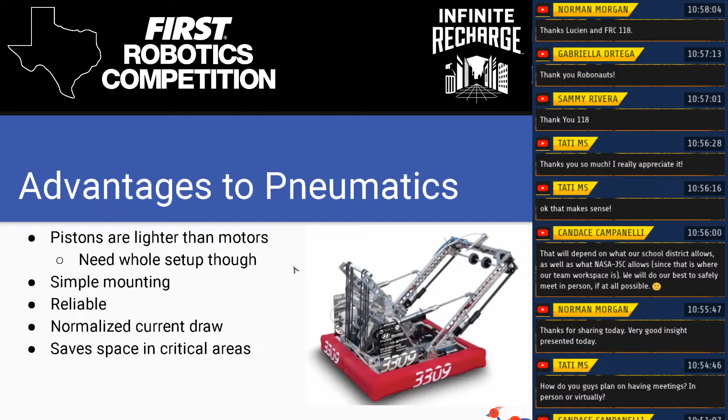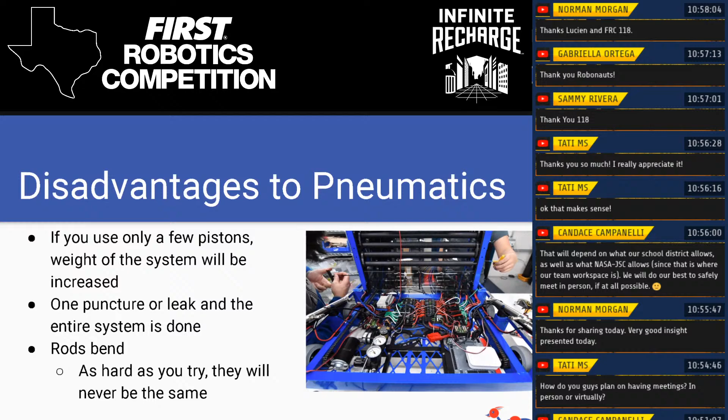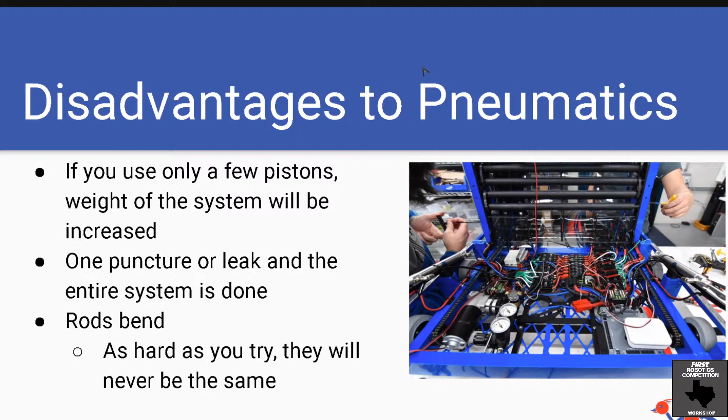Disadvantages to pneumatics: if you only use a few pistons, the weight of the system will be increased compared to motors, since the more subsystems that use pistons, the lighter your robot becomes. One puncture or leak and your entire pneumatic system is done for, because the pressure leaks out, and during competition you'll lose pressure and pneumatics just won't work. Piston rods will bend, and as hard as you try, you will not get them straight again, so you'll need to include something to take the stress off the rods in your design.

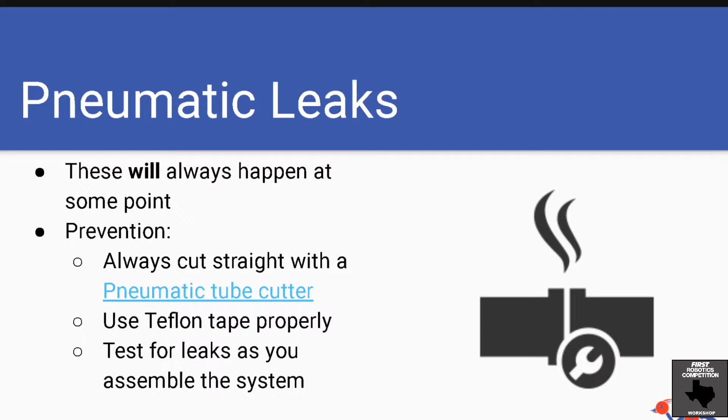Pneumatic leaks will always happen at some point during the season when you're doing pneumatics. Good ways to prevent these are to always cut straight with the pneumatic tube cutter, use Teflon tape properly and correctly, and test for leaks as you assemble the system.

Finding leaks: a couple ways to find leaks. If you're in a quiet environment, you may be able to listen for the source, using your fingers to feel for a leak. Generally leaks might not be felt because they're so slight. Using soapy water is a really good way to find possible leak points, and you need to watch for bubbles because air will make the soapy water bubble. If you're still having trouble, you can section off parts of the system, plug open ends up, and search for leaks there.

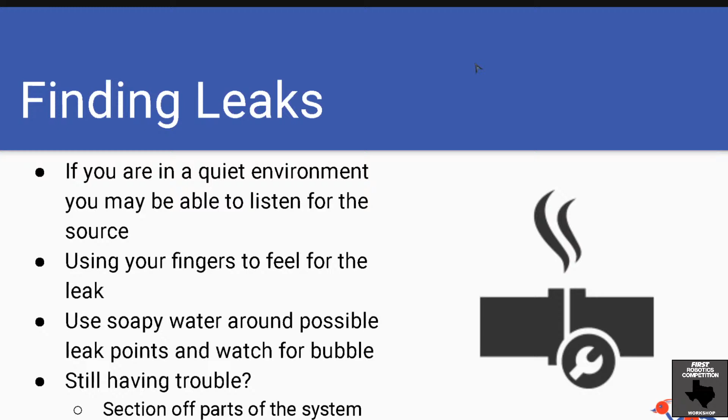Mechanical components, the pneumatic cylinder. This is what is moving your subsystem. The bore size is the hollow part inside the cylinder. The larger the plunger area, the more force you have to use in your subsystem. And that plunger area is basically the bottom of the rod that's getting pushed by air.

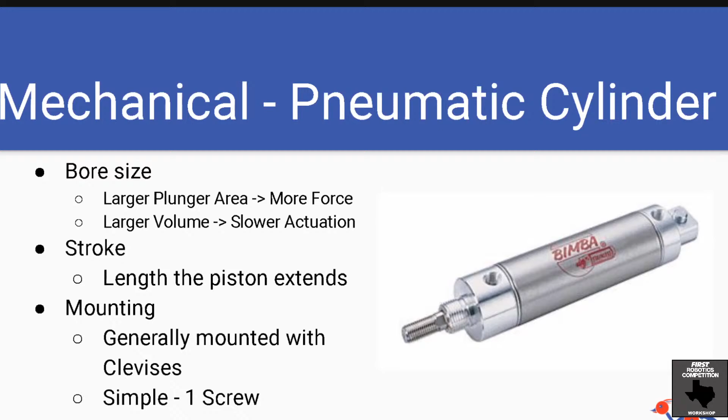The larger the volume inside, the slower the actuation, so you extend slower. The stroke is the length the piston extends, so your rod comes out how much and retracts how much, that all gets included in your design. And generally for mounting, you use clevises, and they're very simple. One screw should be enough.

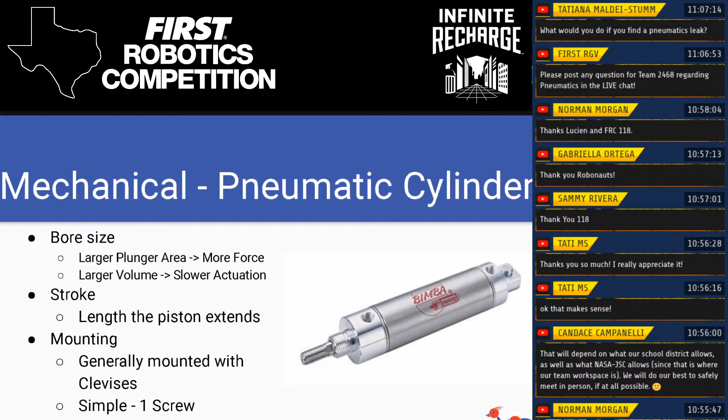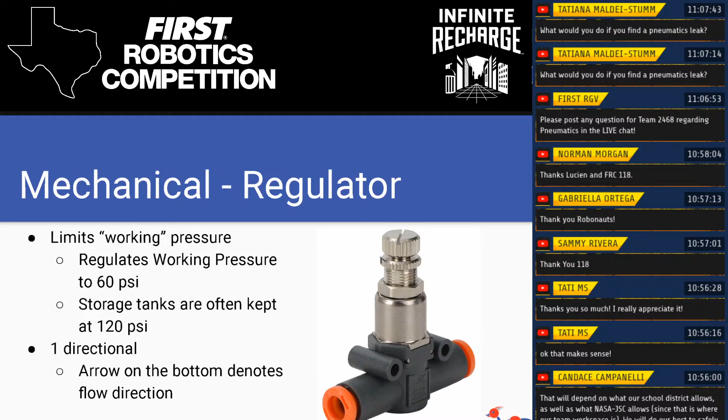The regulator limits the working pressure to up to 60 PSI on the side your pistons are using in the pneumatic system. Storage tanks are often kept at 120 PSI, so storage tanks are where you store your pressure on your robot. The regulators are always one directional; they regulate the working pressure in one direction, not the other, so the air won't be regulated if it's flowing the other way. The arrow on the bottom of the regulator tells you which way your flow is being regulated.

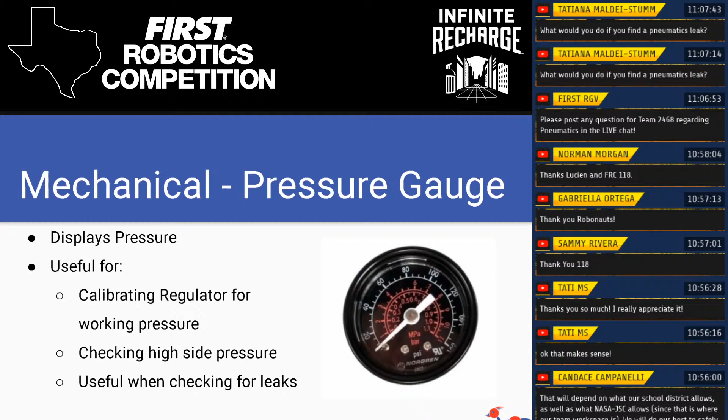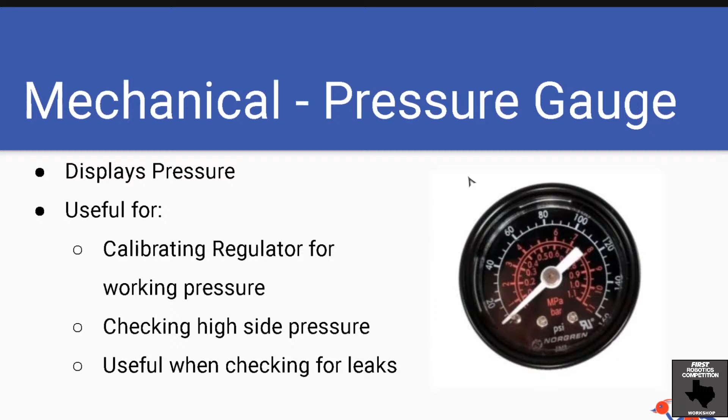The pressure gauge displays the pressure, and it's useful for calibrating the regulator for working pressure and also checking the high side for pressure. The high side is where the 120 PSI pressure is, so your air tank's storing most of the pressure for your robot to use. This is useful when checking for leaks, because if you see that your pressure is going down, there's a leak somewhere, and that's not good, especially for the high side, where you're not going to have enough compressed air to use during the competition.

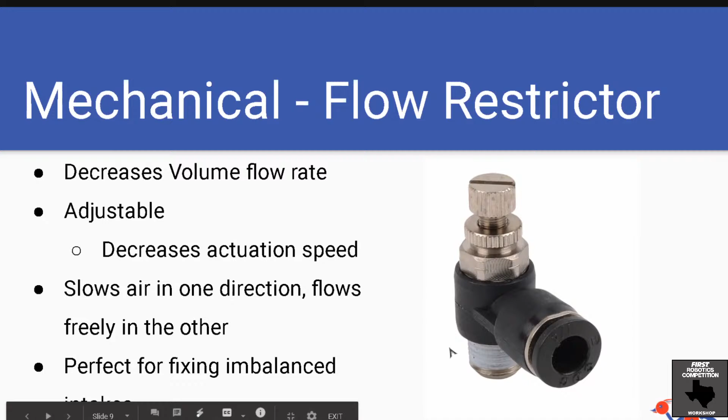The flow restrictor decreases the volume flow rate into the pneumatic cylinders. These are adjustable, so it decreases the actuation speed of your pistons or cylinders. It slows the air in one direction, and the air can still flow freely in the other. So it's similar to a regulator, but used for just slowing down your actuations in general. This is good for fixing imbalanced systems, where maybe you have two pistons with more weight on one than the other, but you want them to extend at the same rate. You can use flow restrictors to slow down the lighter side and make it the same speed.

Air tanks are where you store your air pressure, or the pressure and energy, and these can be used on the low side or the high side of your pneumatic system. The low side is regulated at 60 PSI, and that pressure is used for extending the pneumatic cylinders. The high side is where you're storing more of your compressed air. You can use the AMB design calculator to determine how many tanks you need on each side or at each pressure. It's illegal to modify these, so you don't want to paint them, add stickers, or mess with them at all.

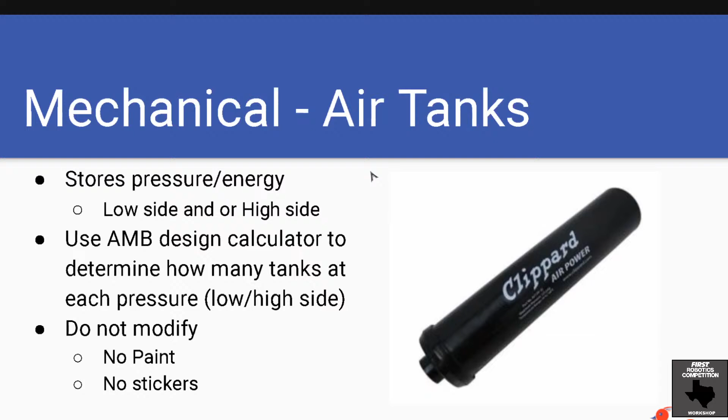The AMB design calculator, this is the pneumatic portion of it, and it calculates the amount of air tanks you need. On the left side chart, you'll put in all your known values for your pneumatic cylinder, time, and cycles, and it'll give you max force and total volume usage. You'll try to match that up with the chart on the right, where your tank volume, number of tanks, and tank pressure give you total tanks volume. So you have to experiment around with this to figure out a good match, how many tanks and what size tanks and everything like that.

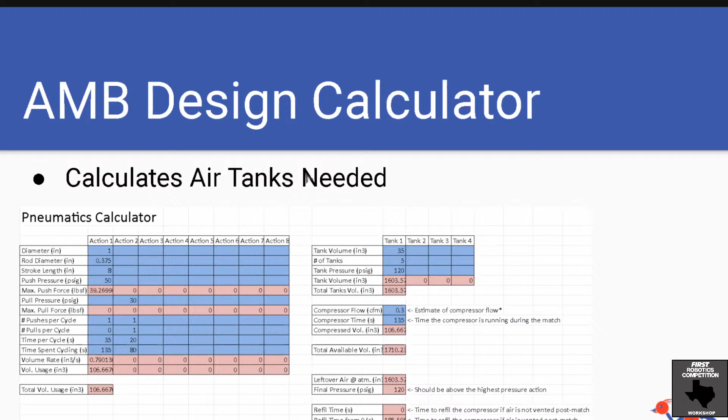Push to connect fittings, that's what PTC stands for. This connects everything in your pneumatic system together, the tubing and where the air flows through. Each fitting generally has about 2 to 7 ports on it, so the one in the picture has 3 ports. You want to ensure the tube is cut perpendicular and neatly, in order to minimize the risk of having leaks.

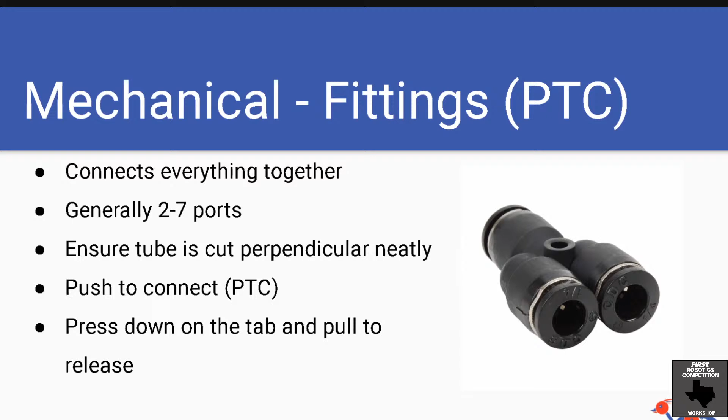These are push to connect, you push the tube in and it stays in. If you want to release the tube, you press down on the tab. You can see these separate tabs on the end in this image, these 3 tabs on the ends, and you press down and pull out the tube.

Threaded fittings connect components attached to the compressor, and you must use Teflon tape for all threads. Although you don't want to cover the first threads because you want to actually be able to thread your fitting into the components. You also use Teflon tape on the threads that will be going into the pneumatic cylinders, which you will be screwing into.

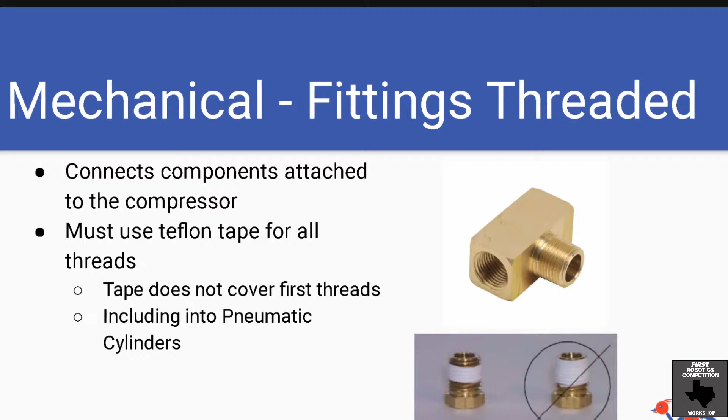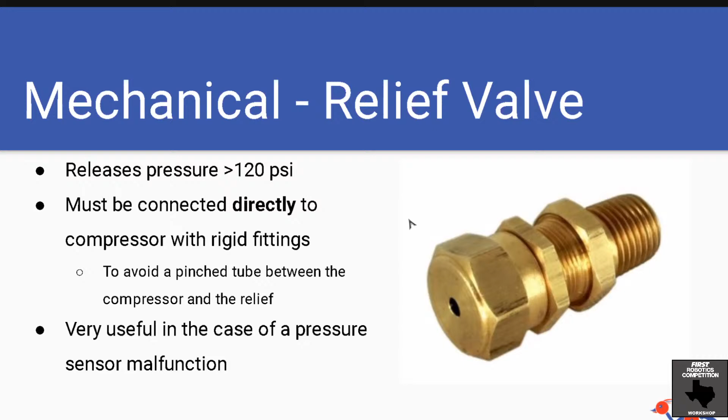The relief valve releases pressure if your pressure in your system goes above 120 psi. You cannot go above 120 psi, that's illegal. This must be directly connected to the compressor with rigid fittings, because if you were to use some type of pipe and it pinched, that would basically render this relief valve useless. This is very useful in case your pressure sensor malfunctions and you don't know the pressure, and in case it goes over, nothing blows up, it'll just release the pressure.

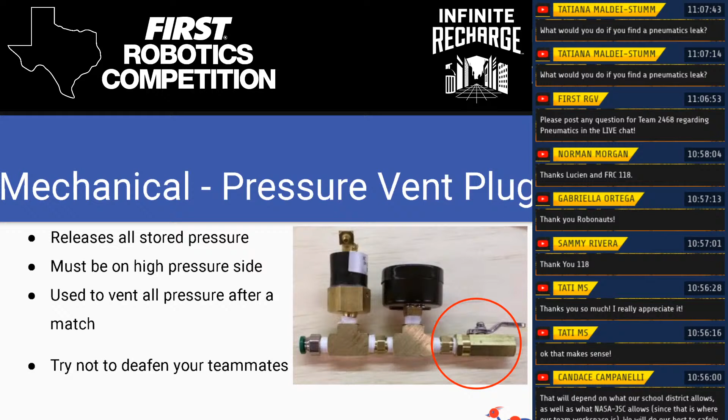The pressure vent plug is where you release all the stored pressure. It must be on the high pressure side because that's where the 120 psi pressure is stored. You use it to vent all the pressure after a match, and when you're doing this, do it slowly. Try not to deafen your teammates because it's very loud in the pit when you're doing it.

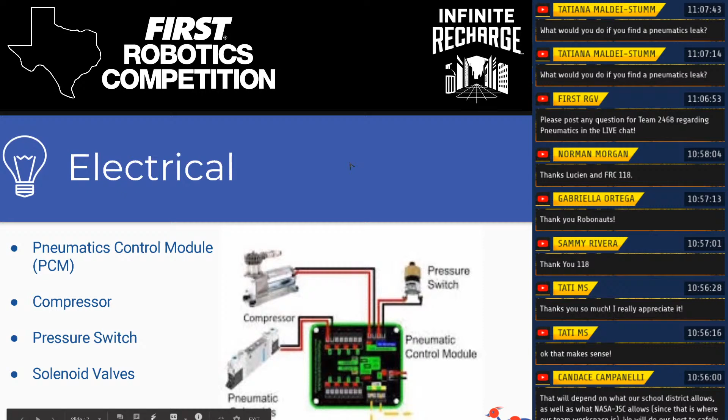Electrical. There are 4 main components for electrical: the compressor, the solenoids, the pressure switch, and the PCM itself.

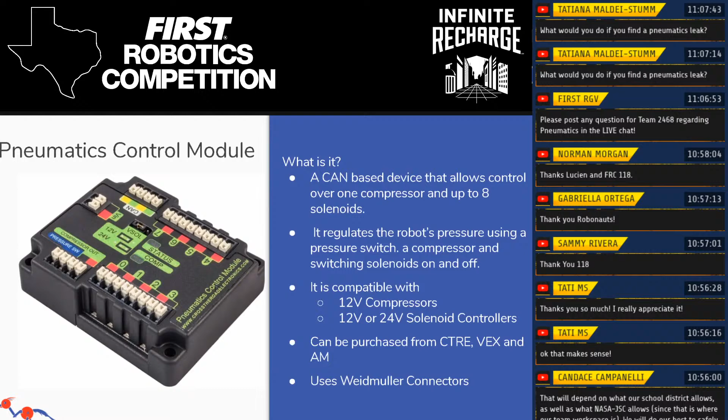The PCM basically controls all the pistons and all the pneumatic components that electrical routes into this. It can control 12 or 24 volt solenoids, but it cannot do both, and you can control up to 8 solenoids with it. The PCM gets power from the PDP and distributes it to the compressor, the pressure switch, and the solenoids. The pressure switch is used to control the compressor, and it's a closed loop circuit, so you can't actually turn on the compressor if you wanted to with code. You can either disable it or enable the entire system of turning it off and on.

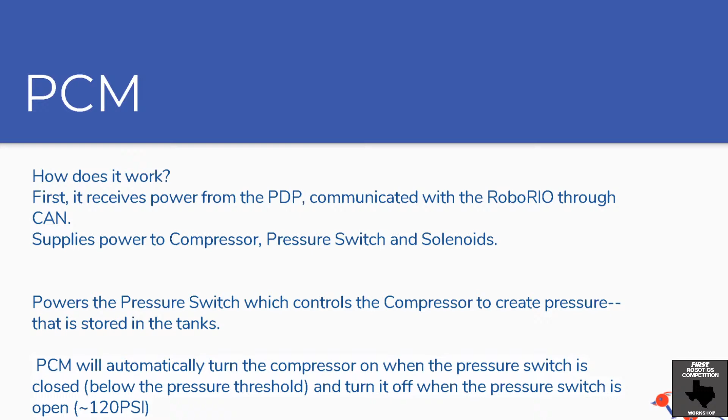The solenoids, as mentioned before, can either be 12 or 24 volt, and there's a little jumper here labeled VSOL under it. That controls all 8 ports. So if you wanted to run 12 volts and 24 volts in one robot, you'd have to have 2 PCMs, each with the jumper in a different position.

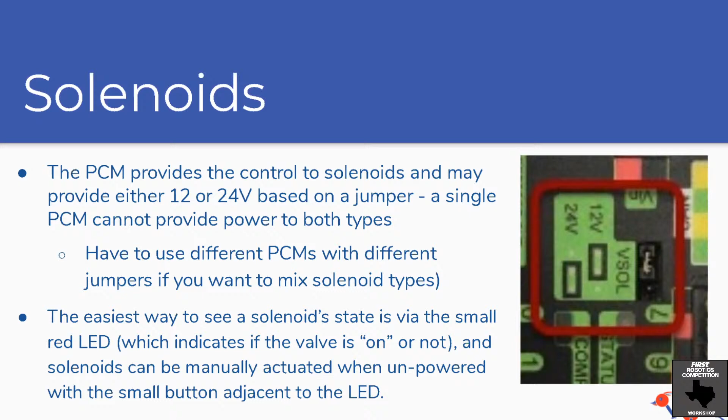From an electronics standpoint, a single solenoid is wired with 2 wires, and it only controls one end, so it moves one end of the valve block. When you power it, it would let the air through, and when you unpower it, it basically springs back and shuts the air off. A double solenoid is the same, except it moves the block from both ends, so when it's on, air flows one way, and when it's off, air flows through a different port the other way.

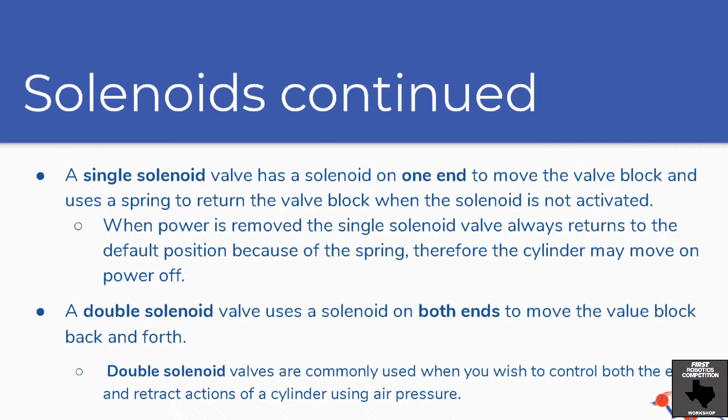John? Sorry, I was trying to share the link.

Component layout on the high side. This is where you're storing the 120 psi pressure. This side must have the relief valve directly attached to the compressor, and it also must have the pressure switch, a gauge, and a vent plug. The regulator will lead to the low side, where it's changing from the 120 psi pressure to the 60 psi.

So a question from chat: what would you do if you find a pneumatics leak?

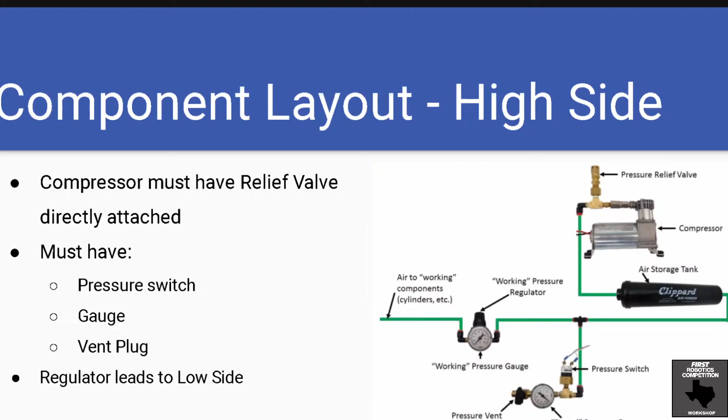When you find a pneumatics leak, generally you find it because you've pressurized and maybe 5 minutes later you see you've dropped 5 psi from the high side. That's a pretty big issue because when you're queuing for your match, you don't want to start with less than the max pressure you can have, because then you're not starting with as much energy in the system.

If you find a pneumatics leak, you generally try to pinpoint it using the methods we showed. You pinpoint it, and there'll usually be a connection of some sort. What we've found in the past is either the Teflon tape wasn't put on well or has come off, or the tube wasn't cut straight. So essentially you depressurize the system, cut the tube straight or rewrap the Teflon tape, then pressurize again and test if you still have the leak. I hope that answers your question.

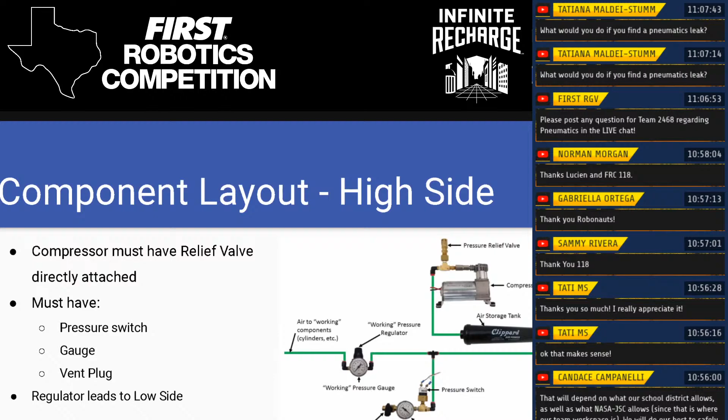From the regulator, the high side to the low side has all your pistons or pneumatic cylinders and also the solenoids. It'll also have the flow restrictor sometimes if you're using those, plus a gauge and air tanks. Air tanks can go on either the high side or the low side or both, depending on how you want to design the pneumatic system.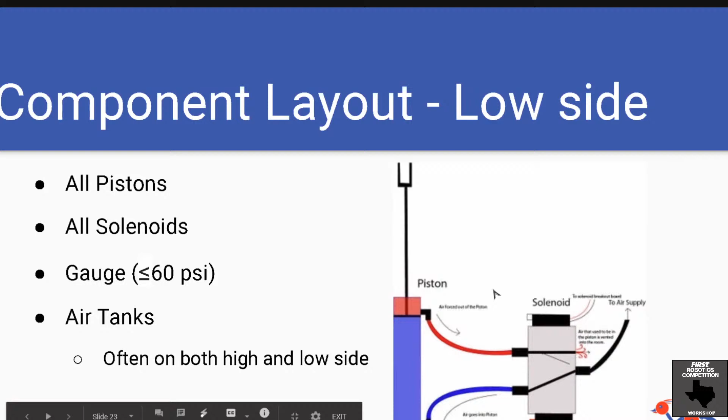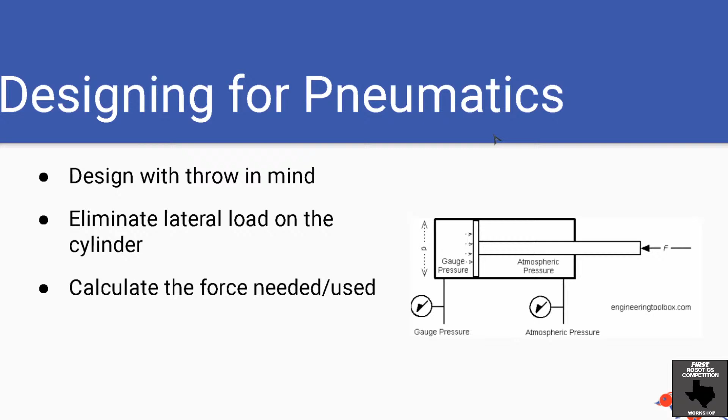So we've told you a bunch of stuff about pneumatics. You might be wondering, how do you design for pneumatics? When designing, you have to think about how far the piston extends and retracts — this is the throw. You have to eliminate lateral load in the cylinder, mainly to avoid bending the actual shaft. Then you calculate the force you need versus the force you have with the cylinder, which determines the bore.

I dimensioned each thing the same. When doing that, you need to avoid horizontal and vertical relations, because that will destroy the model when you try to move it. So I created the extended and retracted states, and then you adjust as needed — you might have been way off with your throw calculations. You need to go back to, say, Bimba, where you're getting your components, and change what you're using or change something in your system. So it's a lot of trial and error involved.

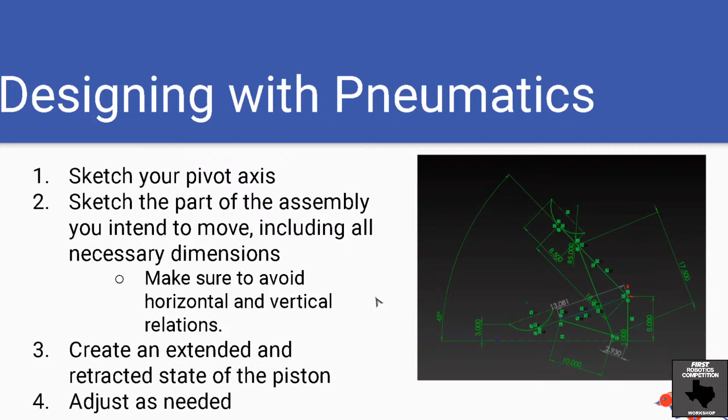Here are some of our resources. We have the JVN design calculator, which does pneumatics as well as a bunch of other stuff. Automation Direct is where we get extra components like the regulator, and Bimba for air cylinders. Vex has things like ball shifters and more general components. And if you've gotten a kit of parts recently, the pneumatic parts in there are from AndyMark.

Does anyone have any questions?